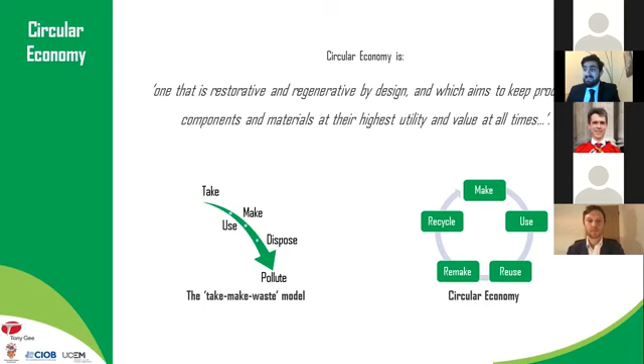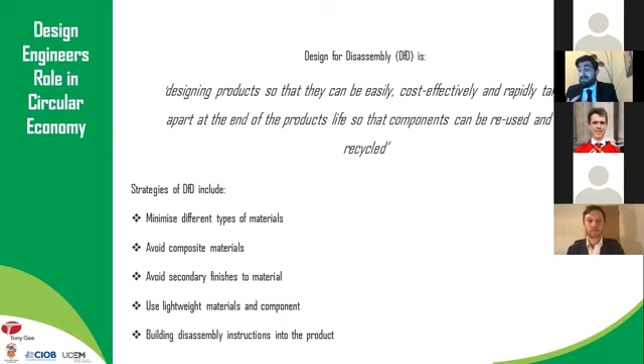This is where I believe design for disassembly comes into the conversation. Design for disassembly, which I will now refer to as DFD, is defined as designing products so that they can be easily, cost-effectively, and rapidly taken apart at the end of the product's life, so that components can be reused and recycled. The concept is built on the ideals of material recovery, value retention, and meaningfulness in the next use. This makes it an ideal enabler of circular economy for design engineers such as myself.

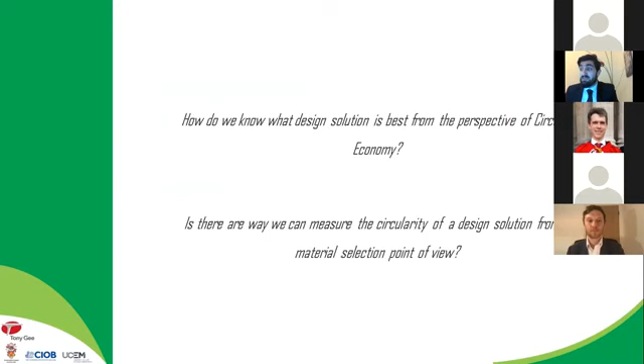So we've established what circular economy is, why we need it, and how DFD can be used to integrate circular economy into infrastructure. This alludes to two important questions. How do we know what design solution is best from the perspective of circular economy? And is there a way we can measure the circularity of a design solution from a material selection point of view? So this leads us on to the toolkit that I've developed to tackle these two very important questions.

The purpose of the toolkit is to enable the design engineering team to successfully determine the most circular design from the perspective of maximizing material recovery and optimizing value retention. The toolkit is a checklist system that a design engineer will use to score and rank each design option for a project. The final score will vary between 0 and 1, with 0 representing a completely non-circular design and 1 representing a completely circular design.

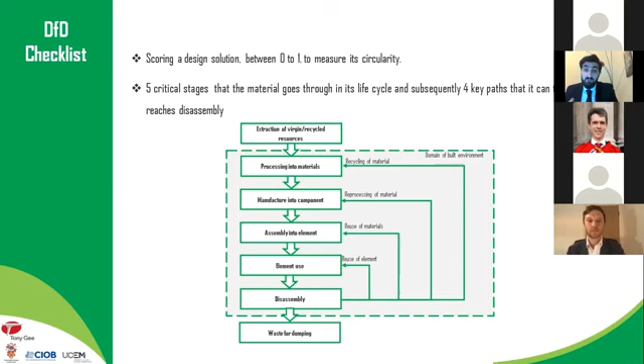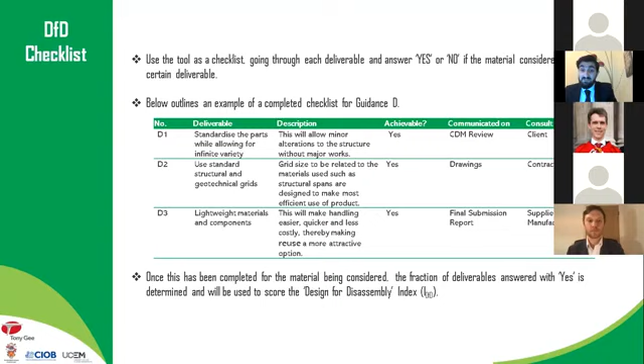In order to work out the DFD index of the design option we are considering for a project, we calculate the mass fraction of the two materials. In this scenario, materials 1 and 2 make up 10 and 90% respectively of the total mass of the design option we're considering in our project. We then multiply the DFD index and mass fraction of each material and finally sum the two products to give us our final DFD index.

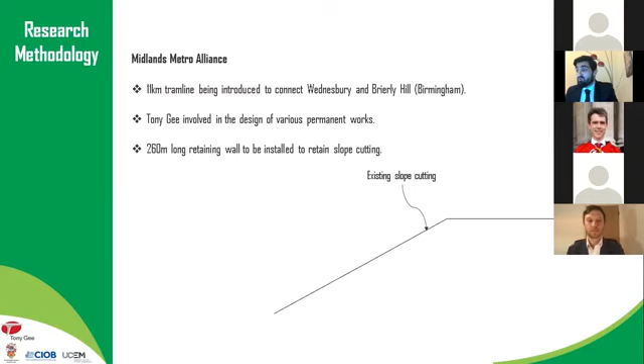So we've created a system that measures the circularity of a design option, but does it actually work? To answer this, I trialed the toolkit on a project I've worked on this year and qualitatively assessed the results. The project that I've used was the Midlands Metro Alliance Wednesbury to Brierley Hill expansion. The scope of the project was to design a retaining wall that would allow a new tram line to be installed. This involved the removal of material from the toe of an existing slope, which would therefore require the installation of a retaining wall.

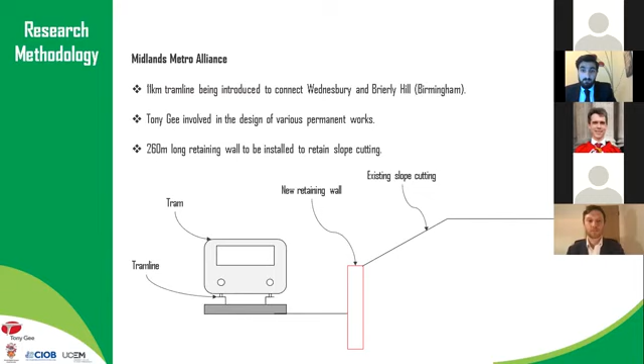The 5 options we considered in this project were option 1, a sheet pile wall solution, which is just made of steel. Option 2, a king post wall with pre-cast concrete panels, which is made of reinforced concrete, steel piles, and granular fill. The third option is a king post wall, but with timber panels rather than a reinforced concrete panel.

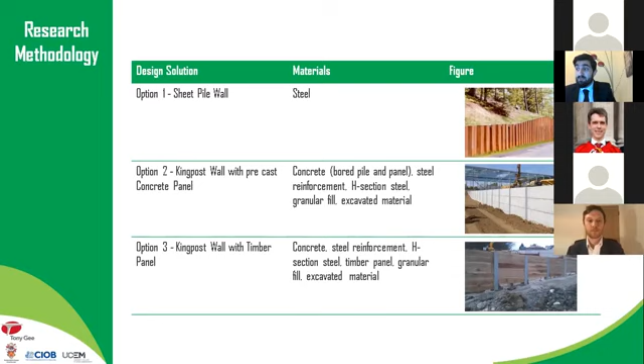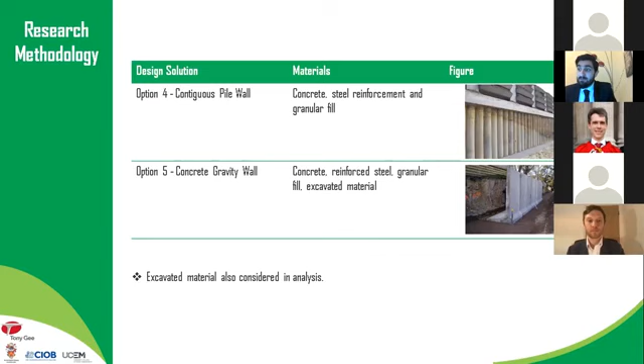The following 5 pie charts outline the mass fraction of each design option we considered. At the center of each pie chart, we have the total mass of that option. In order to represent the DFD index of each material considered for an option, I've used a color contour system where red indicates a DFD index of 0 and green represents a DFD index of 1. Using the process that I went through earlier on with you, the following 5 figures outline the DFD index of the design options we're considering in this project.

The results show that the sheet pile wall, which is option 1, achieved the highest DFD index, but option 4, the contiguous pile wall, achieved the lowest. So we can see that the sheet pile wall achieved the highest score. But can we say it's the most circular? One factor that supports this argument is that the benefit of using a sheet pile wall over the rest of the options is the use of mechanical over adhesive connections, which means the sheet pile wall can be easily disassembled and reused, which is in complete contrast to the contiguous pile wall.

The sheet pile wall is also inherently modular, unlike the rest of the options, particularly compared to options 4 and 5. Being a modular design and being made of steel, it improves its chances of being reused and recycled. Another key driver as to why option 1 achieved the highest DFD index over the rest of the options was the influence of excavated material. For the purpose of this trial, the excavated material was assigned a DFD index of 0, which is equivalent to saying all excavated material is to be sent to landfill.

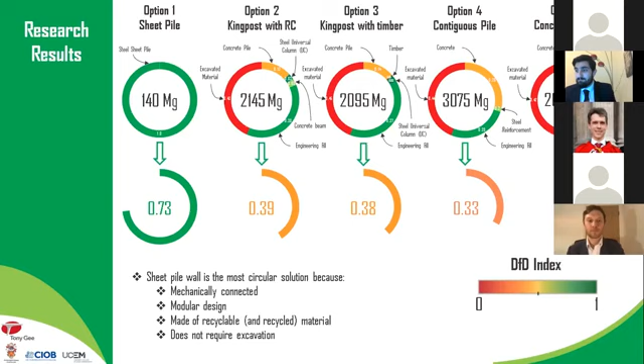There were 2 very important assumptions made in this analysis. The first, as previously mentioned, was that all excavated material was to be sent to landfill. Hence, it was assigned a DFD index of 0. Second, was that both buried and unburied material were considered to be reusable or recyclable. However, it is becoming ever more common for excavated material to be recycled. It is also very uncommon to dig out buried material, and so the likelihood that it can be reused is extremely low.

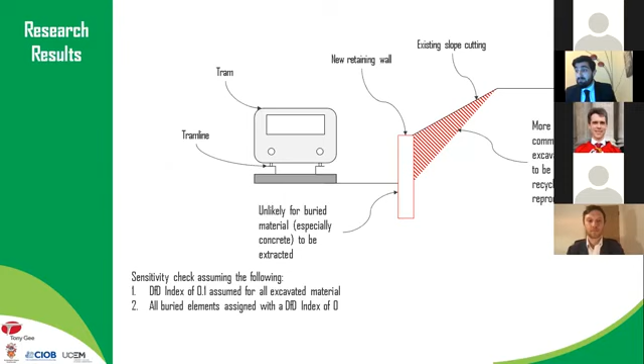So to understand the impact that this could have on the toolkit, a sensitivity analysis was done assuming the following. Firstly, we assign a DFD index of 0.1 to the excavated material to reflect the assumption that it is fully recyclable. And secondly, we assigned a DFD index of 0 to all buried material. We first see the summary of results for each option before the sensitivity analysis was undertaken. The bar chart represents the mass fraction of each material, and we've mirrored the same color contour system that was used in the previous slide.

We then introduce the following figures, which are a summary of the results for each option after the sensitivity analysis was undertaken. We see that in this scenario, option 1, the sheet pile wall solution, still comes out on top, but experiences the largest drop in the final DFD index. However, for option 5, though marginal, we actually see an increase in the final DFD index. So what does this all mean?

The results highlight the importance of not only reducing the volume of excavated material, but encourage optimizing the value of excavation by recycling it in order to maximize circularity in your project. It also highlights the importance of limiting the volume of buried material and focusing on accessibility of materials and elements to ensure we can monitor and disassemble as much material as possible.

The sensitivity analysis also highlights the limitation of the toolkit. As we've seen in option 1, assuming an element can't be disassembled and reused elsewhere dramatically diminishes its value in terms of circularity. What the toolkit does not capture is a guideline that could improve the possibility of reusing it while the element stays at the same location. An example of where this is practiced is in the building industry, where many high-rise extension and refurbishment schemes aim to reuse the existing pile foundations to support the proposed works, and this has proven to be a massive saving in material usage.

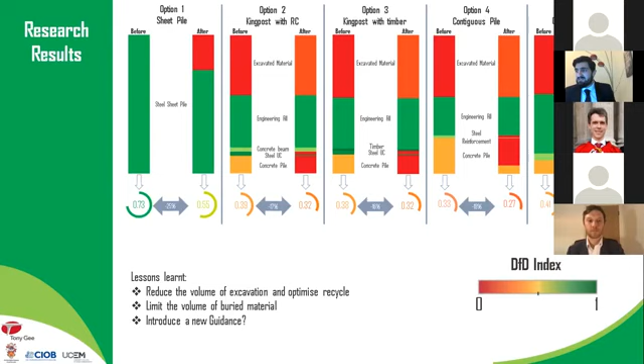Another key aspect of the toolkit is stakeholder engagement. For each achievable deliverable, the user must outline who the designer must engage with to ensure the deliverable comes to fruition. In general, it was found that the contractor will play a pivotal role in achieving deliverables that optimize constructability, waste

reduction, and material security. The supplier and manufacturer play a prominent role in providing key information such as life cycle data about the materials. And finally, the client played a limited but extremely valuable role in storing information, ensuring trackability of assets, and taking ownership of the responsibility for making sure the element is reused or recycled.

So one of the main steps I would like to take is to introduce a new guidance that will capture the benefits that reuse without relocating the elements can have on the overall circularity of projects. I would also like to use the toolkit on a bridge design project to test the versatility of the toolkit.

Moreover, I am keen to learn about the extent of improvement that the toolkit can have on improving value retention and optimizing resource efficiency. I would also like to take the time to develop a grading system that can be used to tell the user whether or not a design is compliant with CEEQUAL guidances.

So in summary, circular economy in infrastructure is a perfect and sustainable alternative to the current take-make-waste model that is causing massive strains on our environment, our economy, and society. Design for disassembly is a key enabler for design engineers to incorporate circularity into their designs. To achieve this, I developed a toolkit to measure the extent of circularity in design solutions to ensure the client picks the most easily disassembled design.

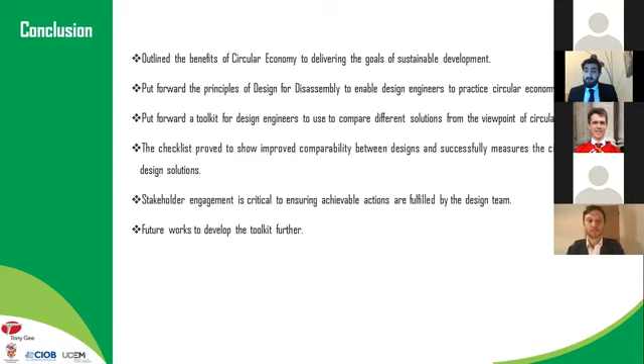The research showed that the toolkit improved comparability between designs by successfully assigning a metric to measure the circularity of different design solutions. I intend to continue developing the toolkit to iron out any faults so that it can provide as much value to infrastructure to secure a sustainable future. Thank you, everyone.

Thank you, Safak. I think that also deserves a virtual round of applause. And there are some actual ones on camera. Are there any questions for Safak?

Hi, I've got one. I don't know if I can jump in. You may. Hi, Saf. Really good presentation. Have you got like a summary sheet which says how you can use the DFD index? I think I followed the presentation, but if there was just a quick sheet that says how to actually give it a go yourself on a project, that'd be quite useful.

It would. Once I start testing it a little bit more, ironing out all the faults, what I'll then do is, if we're going to use it commercially, especially at Tony Gee, the spreadsheet or the toolkit will come with its instructions.

If you'd like to read the paper more and learn a bit more about these deliverables that I've come up with, there are descriptions for each of these deliverables that can enable any user to pick up and use. But I'm more than happy to send you the toolkit itself after this presentation. Yeah, sounds good. If you come to a point where you're fairly happy to share the toolkit, I'd be interested. Thanks. Thank you, Alexa.